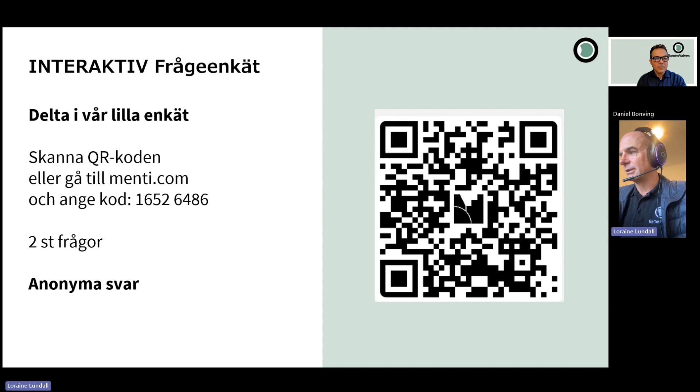So yes, I've got one. So let's see. Cool. 8 respondents, 7, 8. Good. Next slide. I'm going to do the next slide. You can answer the next question. Oh, thank you very much. 7, 8, 9, 10. Now, when you finish responding, you can actually see the results, and the results is actually 0. There's one in. I cannot read this, but you will see the results. Good. Let's go on. Very interesting. People really know this steam stuff, so let's go into it.

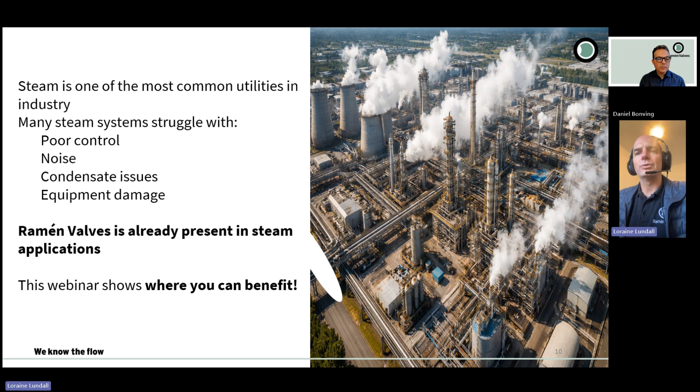So steam is one of the most common utilities in the industry, yet it is often taken for granted. As you will know, valves are frequently selected based on habit because we don't have time. We say this valve goes there, just select that one, it will work. The result is sometimes unstable control, noise, wear, unnecessary downtime. But Ramén is already active in the steam industry, and today we want to make it visible for you. And this webinar will show you where you can benefit from the knowledge that we have.

This is a basic steam system, as you will all know. There's a boiler, there's pressure control systems, or pressure reducing stations, steam control valves, there's vacuum breakers, safety relief valves, and your steam conditioning equipment. And obviously then there is your process equipment and your plant systems that you need to control, that you need to use the steam for.

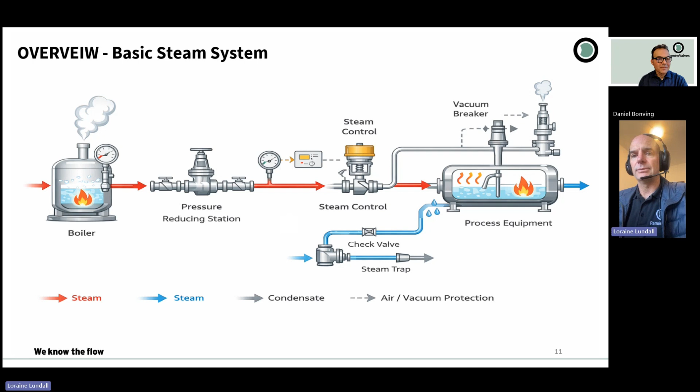So when we want to talk a little bit about steam control, we mostly refer to steam control in terms of the control valve. When we control steam in heat transfer systems, the purpose is to regulate heat transfer. In most industrial steam heating systems, pressure control is used instead of temperature control because saturated steam temperature is directly determined by the pressure. As you all know, when steam condenses, it releases heat at a constant temperature. So maintaining a constant pressure ensures a stable heating condition.

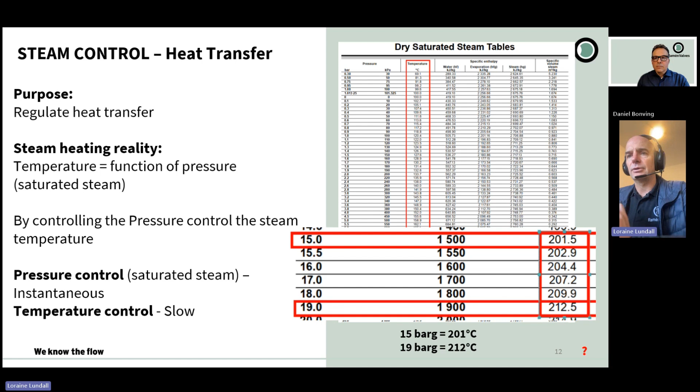So when we reduce 19 bar steam at 212.5 degrees Celsius to 15 bar steam, the temperature drops to 201.5 degrees Celsius. So pressure control of saturated steam is instantaneous, while temperature control has a reaction time over a period to get the same temperature at the specific pressure.

So the rule of thumb: control pressure when steam is saturated and used for heating via condensation. For example, tire curing presses, heat exchangers, steam jackets, autoclaves, dryers, reactor heating, food sterilization. And control the temperature when the steam is superheated and when product temperature is what matters.

So as an example, in a tire curing system, steam temperature is controlled indirectly by regulating steam pressure, because saturated steam temperature is uniquely related to the pressure, as we already discussed. A pressure control loop provides faster, more stable control than a temperature control loop.

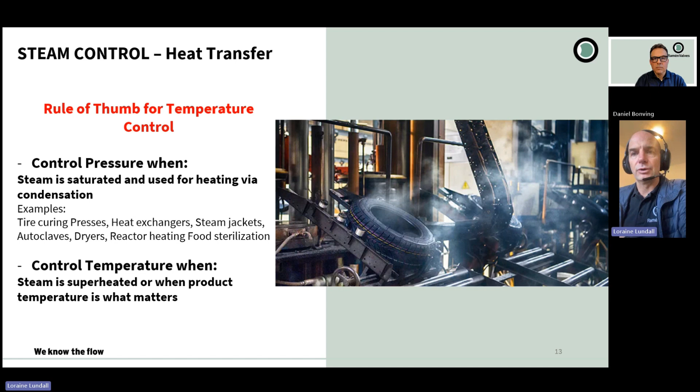So where lie the problems in steam control? We identified basically two. First of all, your valve sizing and selection, and it's not just control valves, it's all your valves in your steam system. And secondly, it is the quality of your steam and the management of the quality of your steam.

So poor valve type selection is another very common mistake: using the wrong type of valve in the application, trying to control steam by using a ball valve or a butterfly valve, which is actually supposed to be for on-off service. It results in poor control, instability, and valve damage. For steam control, a proper steam control valve is the better option because it provides good throttling and very stable control.

Sometimes a pressure regulator is used when a pressure control valve is required. The correct approach is to use a control valve with a proper PID loop when the process load changes frequently, when precise temperature control is required, and when the system is large and/or critical.

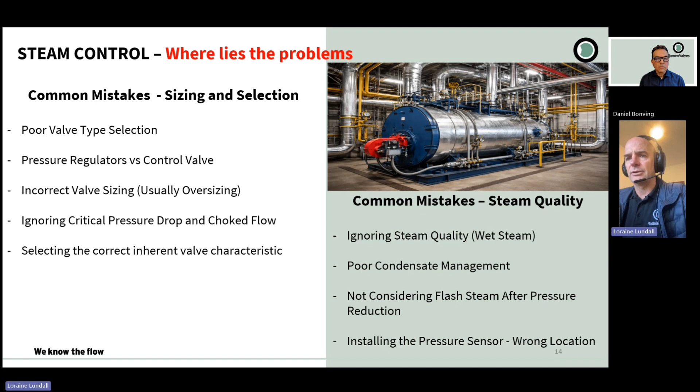From time to time, a big problem is installing the pressure sensor in the wrong location, because sometimes we just don't have enough straight pipe length to install it. So the best practice is to install it 8 to 10 diameters downstream of the valve.

So when you hear a noise in a steam valve in the plant, what does that mean to you? Some people will immediately say it's high flow. But in steam systems, the first symptom you can hear of an incorrect control valve will be the noise. But noise is not just an annoyance. It usually indicates excessive pressure drop, high steam velocity due to high flow, or high pressure drop inside the valve.

But when steam is not perfectly dry, droplets of condensate can enter the valve. As the pressure drops across the valve, these droplets may partially flash or accelerate to very high velocities.

This can create a wire drawing effect, like you see in this valve plug here, gradually eroding the plug and the seat ring. Over time, this leads to leakage, instability, and reduced valve life. So when we hear noise or see erosion in steam control valves, the root cause is often incorrect sizing, incorrect characteristic, operating the valve outside of intended conditions, or just poor steam quality.

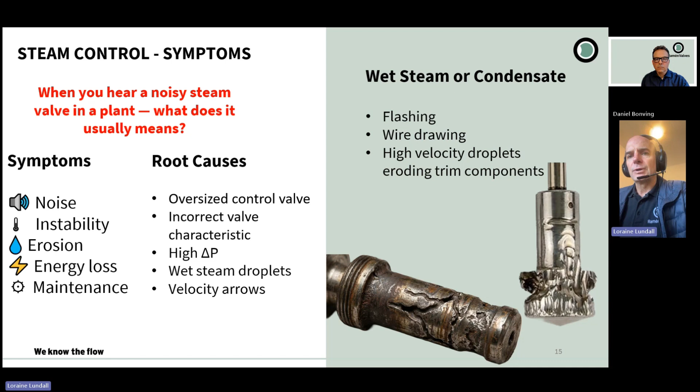So let's go on to valve characteristics in steam heating. Steam control is non-linear, with two key non-linearities present: heat transfer rate changes with load. Why do temperature loops often hunt more at low load than high load? Because at low load, a small flow change causes a large temperature change, but at high load, a larger flow change is required for a similar temperature change. This results in the system gain not being constant.

So why equal percentage? Because in most steam control applications, equal percentage valve characteristics are preferred. Steam systems experience large variations in pressure drop as load changes. When the valve opens, system pressure losses increase, but the valve differential pressure decreases, and equal percentage compensates for these changes, providing smoother and more stable control over a wide operating range. Each increment of valve travel for an equal percentage allows for the same percentage increase in flow.

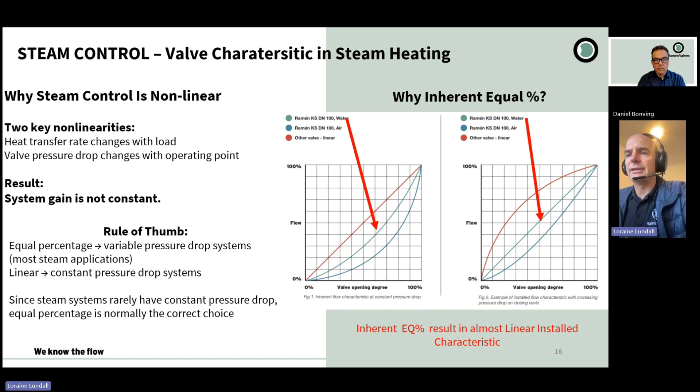One important factor to remember is, as you see the equal percentage curve here, as soon as the valve is installed with a gain that is not constant, you will actually get a more linear curve out of the valve, and this makes it much better for a steam control system.

When we talk steam control valves, we basically break it into three parts for us. One is where you have low differential pressure with high flow, but require high rangeability. This is where the ball sector valve is very good, and it's also standard equal percentage plug, inherent characteristic. Then we have a microflow control valve for small flows and microflows in steam applications where high pressure and high temperature up to 800 degrees Celsius can be reached.

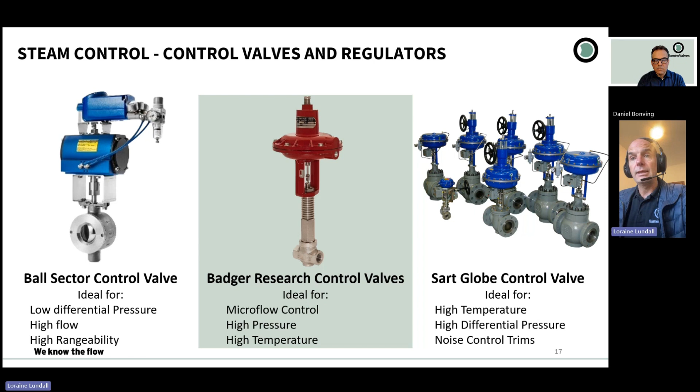And then we also have a normal globe valve where you have high temperature, high differential pressure, where noise and high velocities will be present, but you can install a noise control trim with these valves. So this is a little bit of where we position ourselves.

Then we get to check valves. In systems, condensate formation is not a problem; it is how steam transfers heat. But where do you think the most condensate forms in the system? Only in heat exchangers? No. Condensate forms wherever steam gives off heat. Whenever steam loses energy, it becomes water again. This happens not only in process equipment, but also in piping, particularly during startup or shutdown.

Common locations are heat exchangers, steam jackets, vessels, long pipe runs, and startup conditions. The key engineering question is not whether condensate forms, but whether the system manages that condensate correctly. Without proper management, condensate can accumulate and move in the wrong direction.

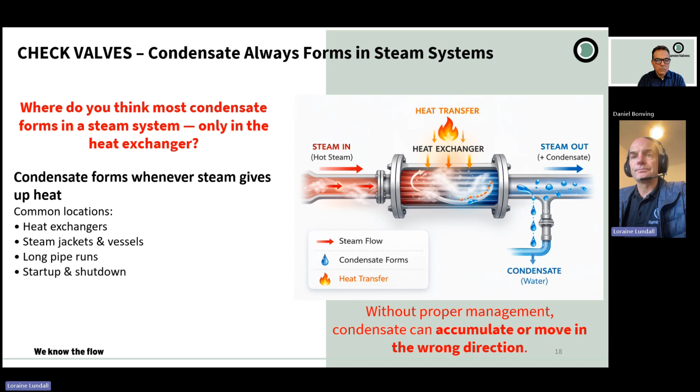When steam condenses during shutdown, pressure in that section of the system can drop very quickly. If another part of the system still has higher pressure, condensate can be pushed backwards through the piping. This reverse flow can create a water hammer and often reach control equipment, valves, flow meters, transmitters, etc., causing instability or damage. A properly selected check valve prevents this by allowing flow in only one direction.

I would say a requirement for a check valve in steam is obviously high temperature; it must be reliable sealing, and it must be erosion resistant.

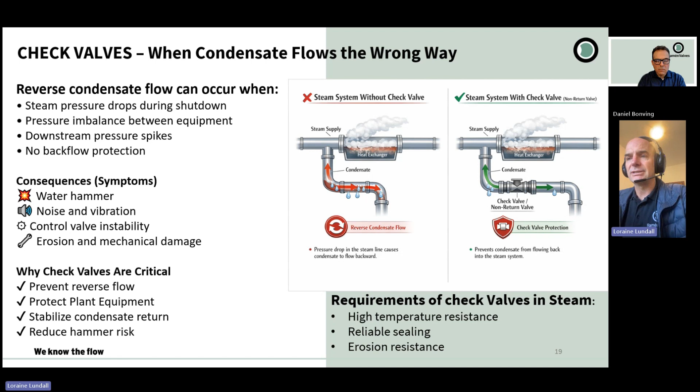Then we get to pressure reducing stations. Industrial boilers typically operate at high pressures to distribute heat efficiently, and the pressure is then reduced at the point of use to match the requirement for the process in that part of the plant. So pressure reducing stations are a common and very essential part of most steam systems.

Symptoms of incorrectly sized pressure reducing stations or regulators are pressure fluctuations downstream, hunting or unstable control loops, excessive noise or vibration. Regulators operate mostly near the closed position, which can cause wire drawing, hunting, or chattering in the valve. The root cause is an oversized regulator, such as selecting a 2-inch regulator for a 2-inch pipeline, incorrect flow estimation, large pressure drops across the valve, and poor steam load predictions.

These days, we can accurately size a regulator for your application. There's no need to just choose line size.

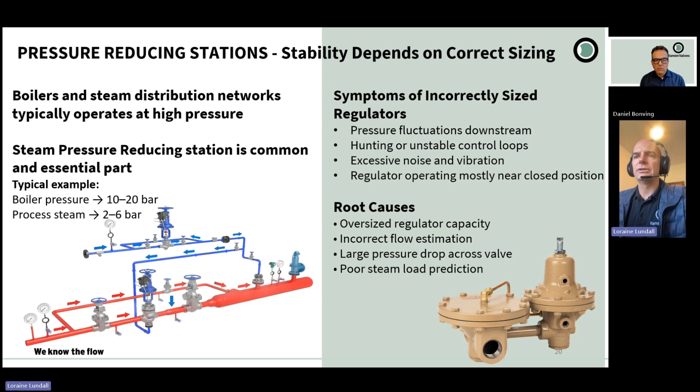Why does overpressure occur? Steam pressure can rise very rapidly in a system. So we talk a little bit about safety relief valves because it goes hand in hand with a lot of things in steam. The role of a safety relief valve is to protect equipment, protect personnel, and comply with pressure codes.

If a pressure regulator fails, you can get high pressures and need to relieve that to protect your downstream system. Control valve failure, blocked or closed downstream lines, thermal expansion or trapped condensate, and rapid load changes can all cause this.

Typical application installations are on boilers, pressure vessels, steam headers, and downstream regulators. A steam system without a safety valve is like a car without brakes.

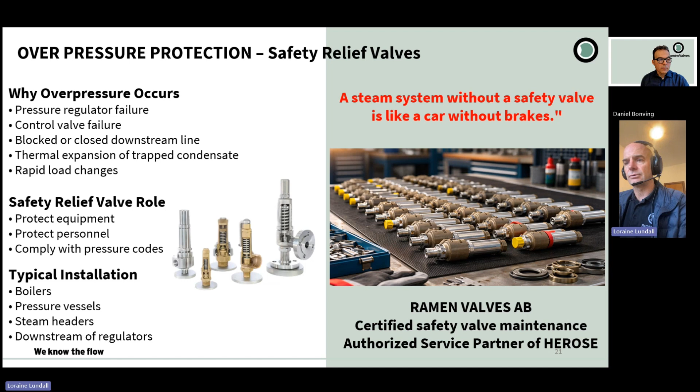One thing that is sometimes overlooked is vacuum. Vacuum creates more mechanical stress in systems than pressure some of the time. Before discussing vacuum protection devices, it's important to understand why vacuum forms in steam systems in the first place.

The internal pressure begins to drop rapidly. As the pressure inside the equipment drops below atmospheric pressure, a vacuum condition begins to develop, and at this point the outside pressure, which is 1 bar, starts pushing inwards on the external walls. This is an important point. Most steam equipment is designed to withstand internal pressure pushing outwards, but it's often not designed to withstand external pressure pushing inwards. This is why vacuum conditions can be surprisingly destructive in steam systems.

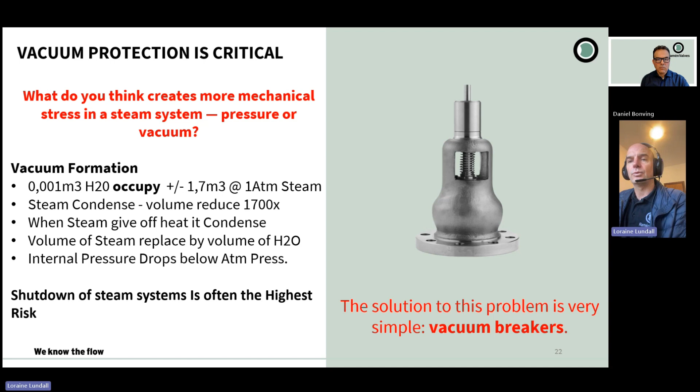You can observe the symptoms as pipe deformation, vessel wall distortion, or unusual noise during shutdown, all of which can be indicators that vacuum is forming in the system. There's a simple solution: just add a vacuum breaker that will allow air into your system when vacuum is formed.

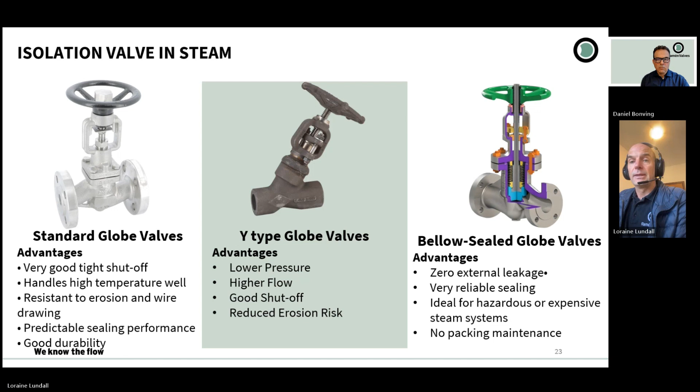So we're going to quickly touch on isolation valves. There are different types, I'm not going to go into detail. There's standard globe valves, Y type globe valves, bellows sealed globe valves. Then also we have gate valves, metal seated high performance butterfly valves, and triple eccentric butterfly valves.

Rather than focusing on each valve type individually, it is useful to step back and look at the overall picture in steam systems. Isolation valves all serve the same purpose: to rapidly stop flow for safety, maintenance, and operational control. However, the way they perform that function differs depending on design. For most process steam applications, globe valves remain the preferred choice because they provide reliable shutoff under high temperatures and changing conditions.

When flow capacity becomes more important or pressure drops need to be limited, a Y type globe valve is often selected, offering similar sealing performance with improved flow characteristics. As pipe sizes increase, particularly above DN250, butterfly valves, especially triple offset designs, become more attractive, mainly due to their lower weight, compact size, and lower cost compared to large globe or gate valves.

Gate valves are still found in many systems, especially older installations and large mains, but they require careful use. They perform well when fully open, but can be prone to damage if not operated correctly. In applications where leakage cannot be tolerated, for example in chemical or high value steam systems, bellows sealed globe valves are often used to eliminate stem leakage.

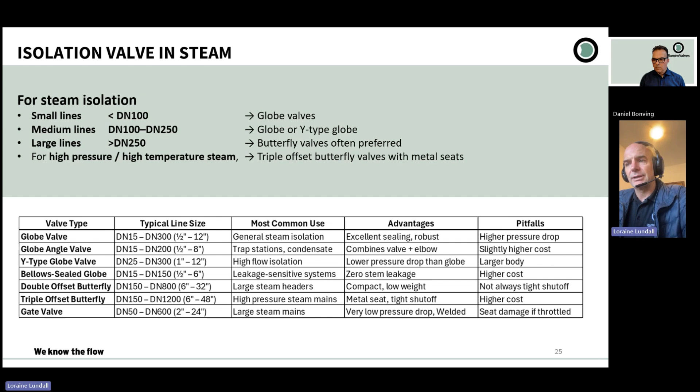Then there is steam traps. I'm not going to go into a lot here, but steam traps are often small components, yet they are absolutely crucial for efficient steam systems. Their job is to automatically remove condensate, air, and non-condensable gases while keeping valuable steam inside the system. If condensate remains in the system, heat transfer becomes insufficient and water hammer can occur. A properly functioning steam trap allows condensate to leave immediately while preventing live steam from escaping.

So we touched on the basics, a helicopter view of the steam system. I want to give back to Daniel and he can take control from here.